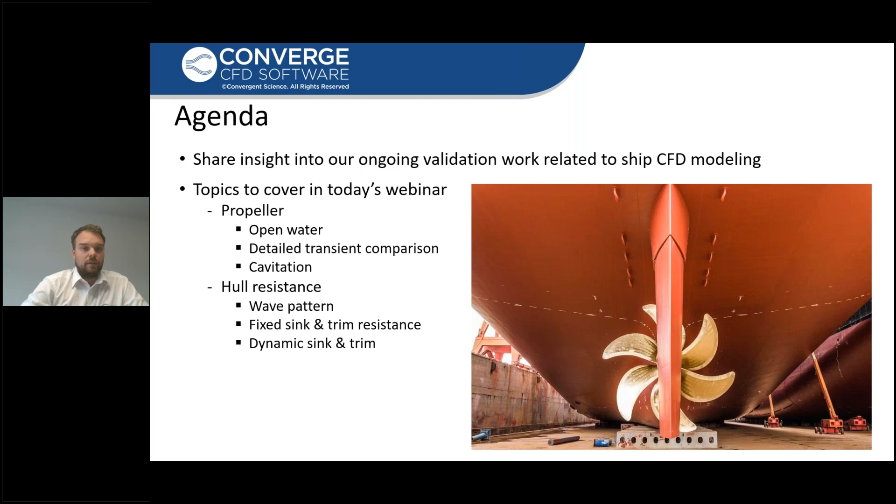But before that, just a few words about why we're doing all of this. So shipping is very important for global trade, and even though it's a very efficient method of conducting this transportation, it's still responsible for a large amount of greenhouse gas emissions.

So with the current environmental situation, of course, we need to reduce emissions to achieve those milestones. And to achieve those goals in the shipping sector, we must look at alternative fuels or propulsion systems, as well as continue to improve the overall ship efficiency.

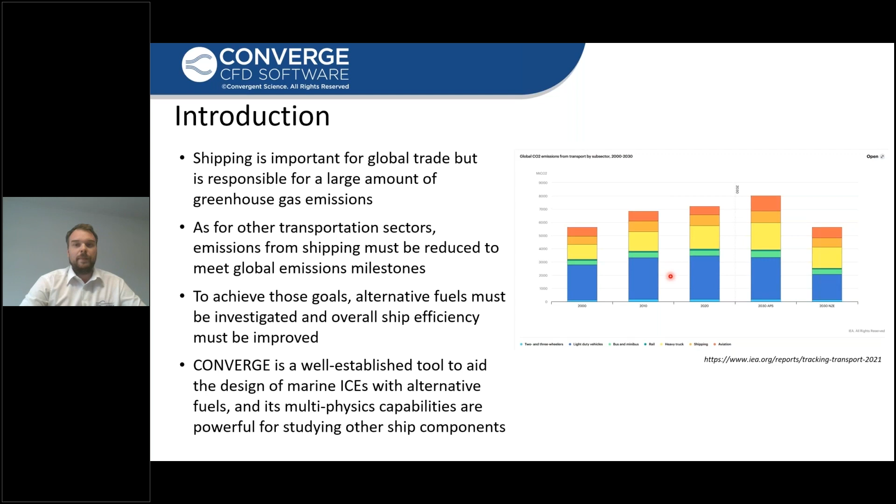So CONVERGE is a well-established tool to aid the design of marine ICEs, also for alternative fuels, and the multi-physics capabilities are powerful for also studying other parts of the ship design, which we will focus on in this talk. So let's jump right into it, starting with propeller modeling, first with the open water modeling.

The tests we are modeling are all at a constant rotational speed of 15 rotations per second. And in those tests, the thrust and torque were measured on the blades. So really the objective of these simulations is to establish the open water characteristic curve, where we are looking at the dimensionless thrust, torque, and propeller efficiency for a wide range of advance coefficients.

So generally speaking, those coefficients are made dimensionless by looking at the torque and the thrust on the blades, normalized with the propeller diameter, the rotation rate and density. What I just want to highlight a little bit more is that the advance coefficient is basically a non-dimensional form of the normalized vessel advance velocity.

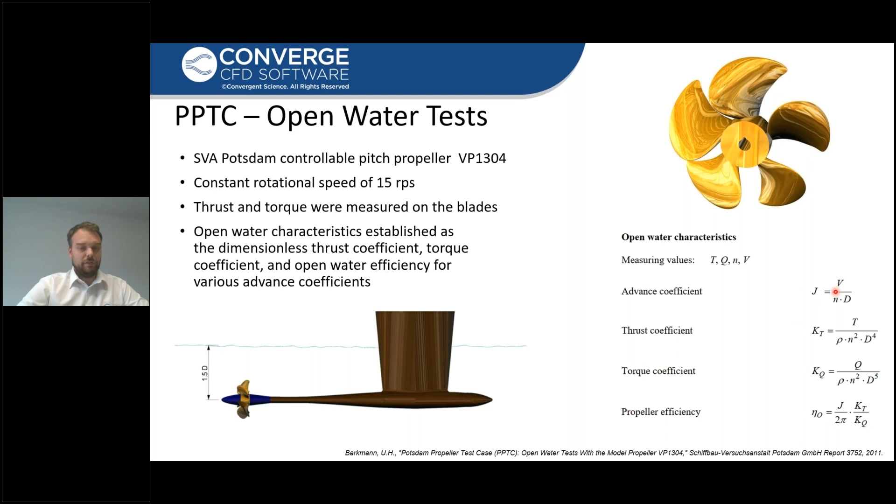And depending on the operating conditions here, we are around, let's say, 1.5, 1.6 million cells, depending on the AMR. So we use adaptive mesh refinement here based on velocity as well as the Y plus. So the reasoning why we're using it for the Y plus in these cases is that we want to have as uniform Y plus over the entire blades as possible, as well as we want to use the same simulation setup over the full range of advance coefficients.

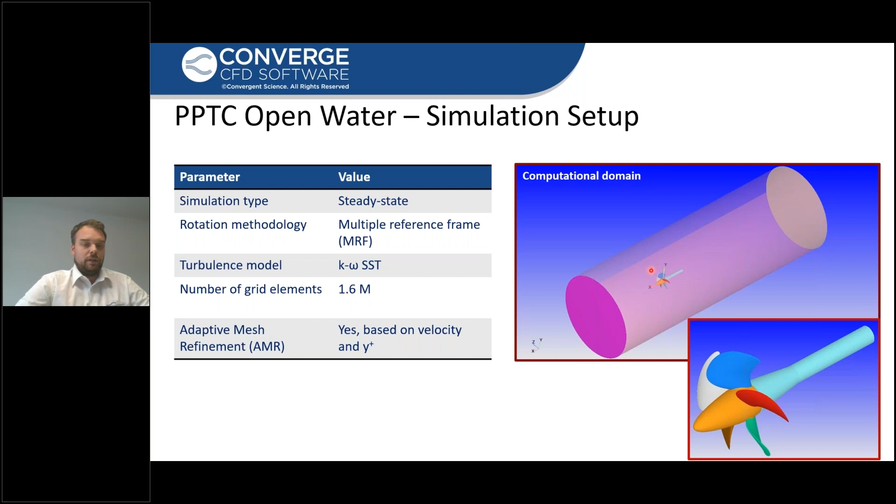So we are relying on wall functions here. We are not fully resolving the blades, and the reason for this is that our intention is to go to ship scale, where it might not be fully reasonable to fully resolve the boundary layers at those length scales.

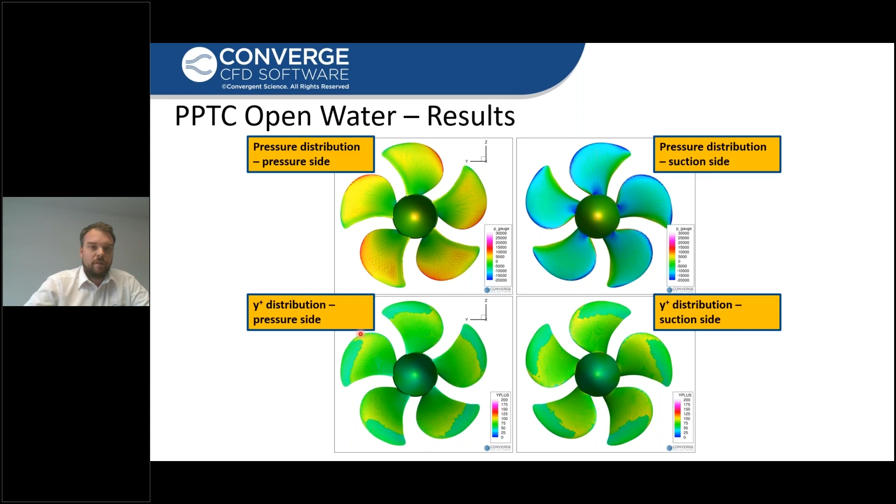And we can see overall throughout the entire range of advance ratios, we managed to very nicely capture the thrust and the torque with a maximum error of around 5% or so. And we also managed to nicely capture the peak efficiency point at 1.4 advance ratio coefficient.

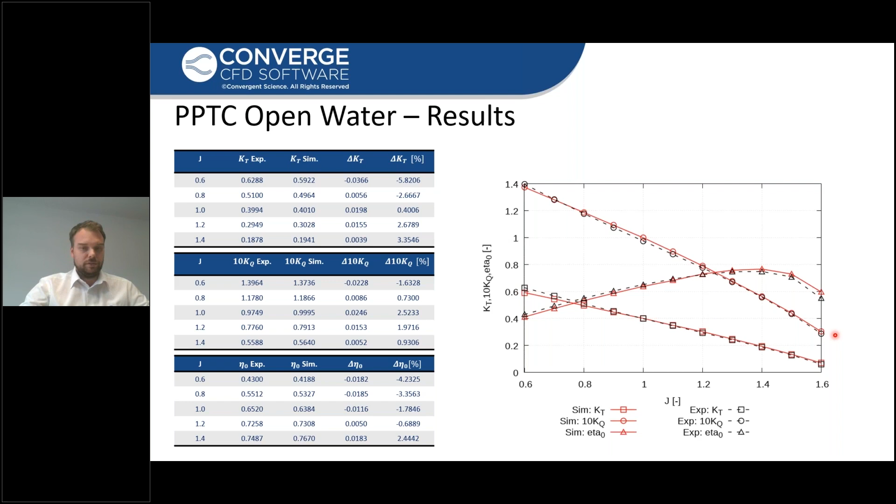So moving on to the transient simulations. So here again we're using the case and data from the PPTC. So in this particular test we're using the same propeller, but instead of the open water configuration, these measurements were done in a cavitation tunnel with a cross section of 600 times 600 millimeters.

And in these cases, LDV measurements were performed to give a very detailed description of the transient velocity field. So what we have is several planes downstream and upstream of the propeller with many monitor points where the velocity has been measured in all the different components.

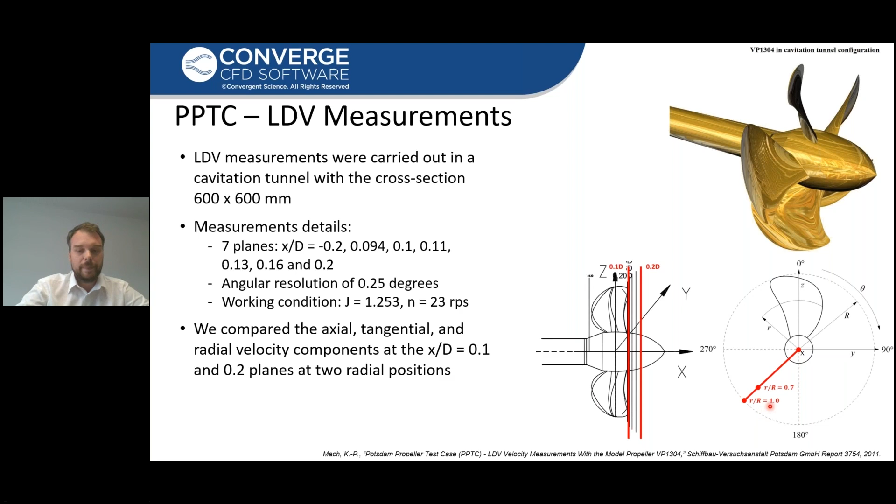So the simulation setup is again very similar, but instead we don't have this backward facing configuration anymore. It's the forward facing shaft, and we don't have the open water geometry anymore. We have actually modeled the actual geometry of the cavitation tunnel. So we have this cross section as described before with some rounded corners. And again, we have the inflow from the left side and the outflow from the right side.

The main difference is that these cases are no longer steady state. We are running this one in transient configuration, so we are actually rotating the propeller with the moving boundary approach in CONVERGE. So we use the k-omega SST turbulence model also here, but we allow a bit more refinement using AMR in this case, so the cell count tends to go up towards 9 million towards the end of this simulation. Since we're not looking directly at forces, we don't have AMR enabled on the boundaries itself, but only based on velocity and also helicity to try to preserve the vortices as well as possible.

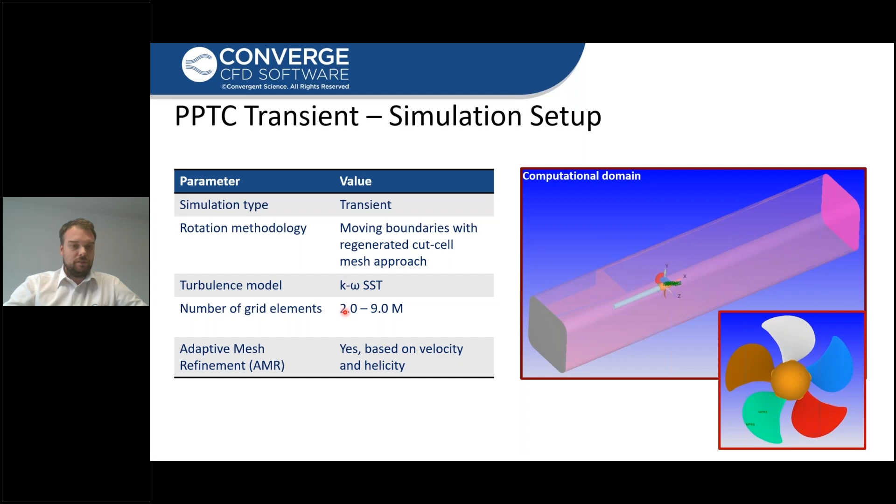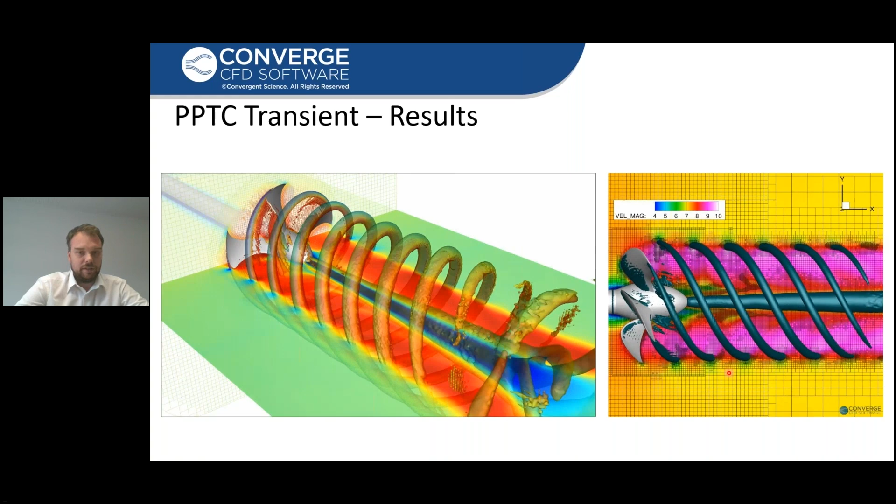So looking at one of these simulations, we have here on the left side an animation showing the cut plane through the propeller, showing how the mesh is updating over time. We have also another cut plane showing the velocity magnitude, and here the vorticity is illustrated by the isosurface of the Q criterion. So maybe more interesting is the animation on the right-hand side, again showing the same quantities, but we can see how the AMR is working to not only refine based on velocity, but this finest level of refinement is following the tip vortices as they're being transported downstream. We manage very nicely to capture this phenomenon.

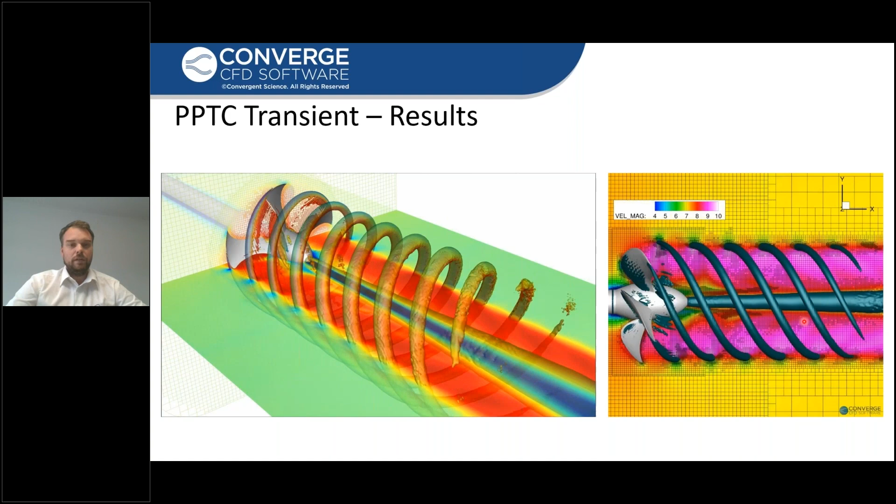But again, looking a bit more quantitatively, here we have the different velocity components compared between simulation and experiment. We have the simulation results in the solid lines, with red showing the axial velocity, blue the tangential component, and green the radial component, all normalized based on the advance velocity. On the left-hand side, we see the monitor point at x over D of 0.1, the plane closest to the propeller, at 0.7 times the propeller radius, and on the right-hand side at r over R of 1.0. These results are the transient velocity components over 1 revolution of the propeller, so 360 degrees. This means that we have all 5 blade passings captured in this monitor.

So we can see overall we manage very well to capture the magnitude and the trends of this transient phenomena. We do not fully manage to capture the magnitudes at the very edge of the blade tips as the blades are passing by. In these regions, the gradients are very strong, and it's possible we could have improved this by refining the mesh, but we have not done this at this point. Here are again the same measurements, but for the plane further downstream, and you can see, moving down only a little bit, these very strong velocity gradients at the blade tips have diminished, and we now manage much better to also capture the magnitudes.

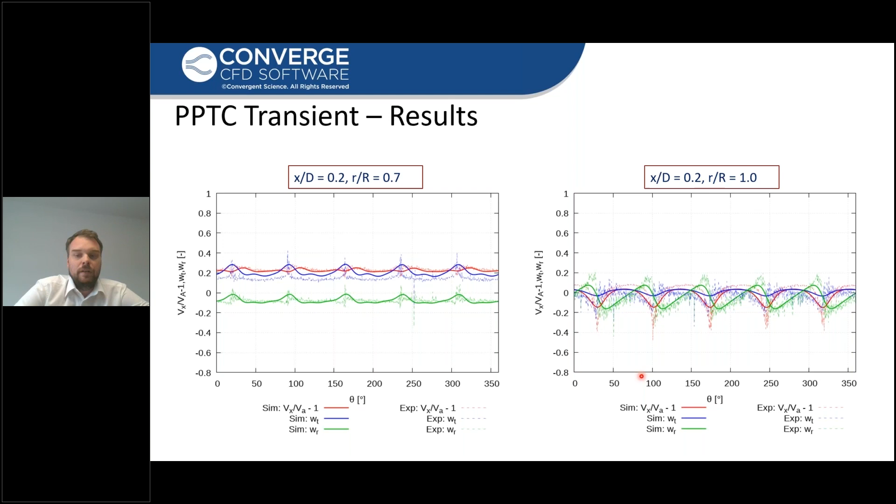So moving on to cavitation modeling. We have again run one of the operating conditions given in this PPTC report, the 2.3.1 condition. We have an advance coefficient of about 1 and a cavitation number of about 2, and now a bit faster, 25 revolutions per second. This simulation uses the exact same setup as the transient one previously shown, but the main difference is we are not running single phase anymore, as we need to also model the vapor. So it's a multi-phase simulation using the volume of fluid approach, and here we're using a Saito cavitation model. If you're familiar with CONVERGE, this cavitation model is not currently in the software, so we implemented a few new ones which will be available in our upcoming release. And it's no longer the k-omega SST turbulence model; now we are using the RNG k-epsilon.

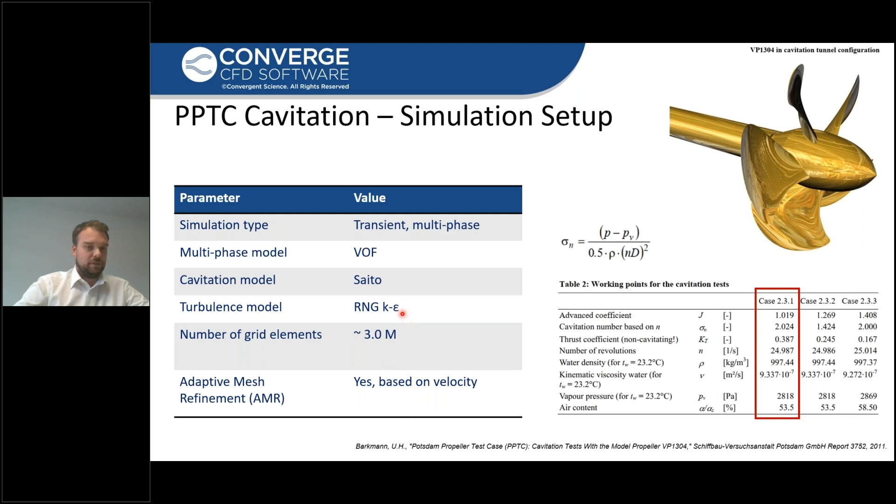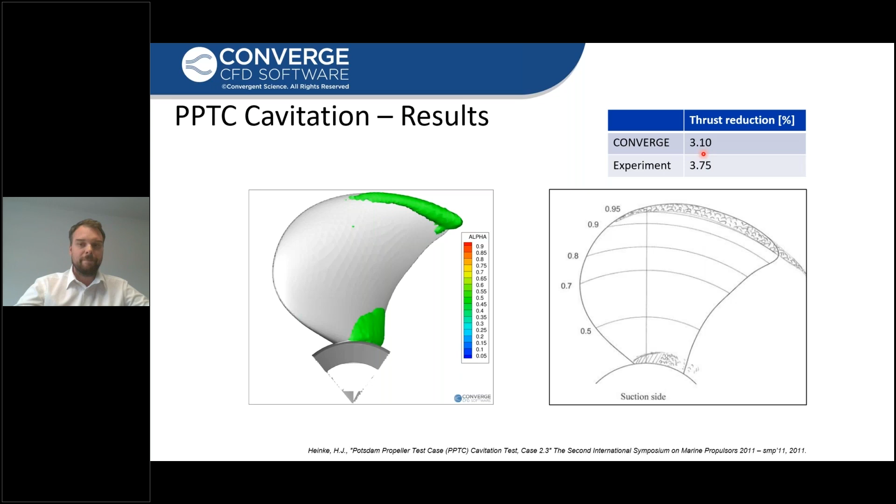And just looking at some of the results of the cavitation. On the left-hand side, we see the isocontour of the vapor volume fraction of 0.5, the simulation results for one blade. On the right-hand side, we have the sketch from the report of the location of cavitation observed. We can see that we managed very nicely to capture this location as reported. But not only the location, we also managed to reasonably capture the reduction in thrust due to cavitation. We observed a 3.1% reduction of thrust, whereas in the report it was measured as 3.75%. So that was all I wanted to show quickly about propellers.

So moving on to the hull resistance simulations. To do this validation, we ran simulations on this INSEAN 2340 model of this US Navy naval combatant. And here we are using the measurements and data reported by Olivieri et al. in this paper.

And in these tests, they did many measurements of this scaled model in this towing tank. And here we have much data: we have all the wave elevation profiles, we have the drag decomposed in pressure and viscous components, and also the dynamic trim and sinkage, which are occurring for a wide range of Froude numbers between 0.05 and 0.41. So we have this data for a wide range of vessel speeds.

So we can see here's a table of some of the model parameters. So I just want to point out that this particular case has a scaling factor of 24.8, so almost 25.

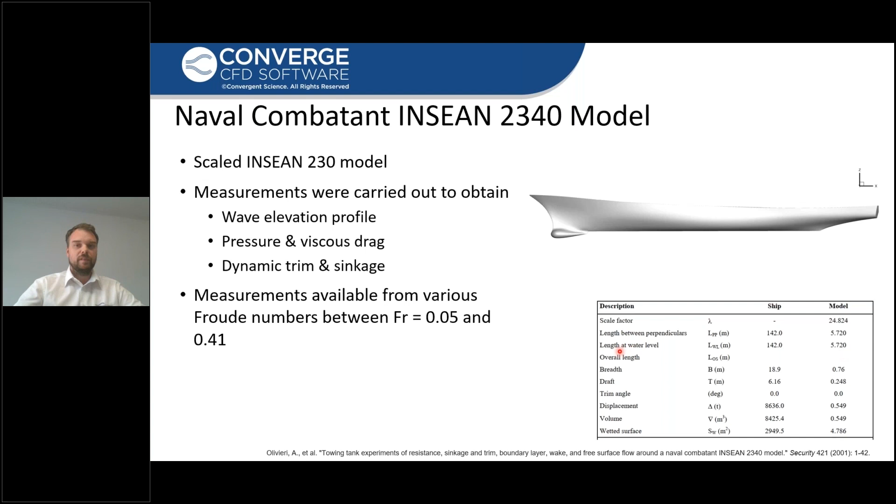And to do this, we are again using the volume of fluid approach. So as in these cases, it's of great importance to capture these waves with as great accuracy and resolution as possible. So we are using a front capture model, which is HRIC, which also enables some surface compression to try to keep this as resolved as possible. Again, it's the k-epsilon turbulence model.

And as we are very interested in forces, even at this scaled model, the length scales are quite large. So we are modeling the boundary layer using the inlaid mesh feature in CONVERGE. And so we have a first boundary layer cell size of about 1 millimeter with 5 layers at 1.5 expansion ratio. So I want to highlight the goal here is not to fully resolve the boundary layer all the way down to y+ of 1 or so. We are still targeting y+ of around 30.

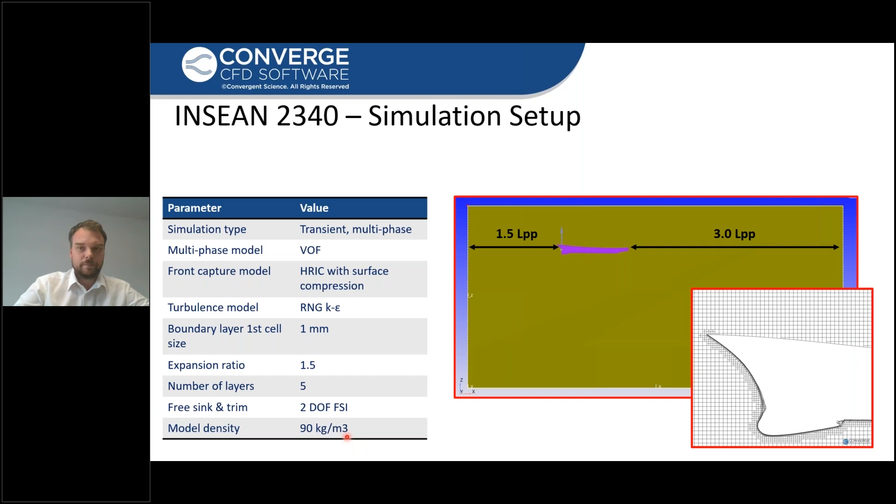So looking at some of the results, here is showing one case, this particular one is at Froude number 0.28. And what we see on the right side is the iso surface of the waves. So it's the iso surface of alpha 0.5 colored by the normalized wave elevation height. And what we have done is we have taken these 3 cut planes as highlighted by the dashed black lines and plotted them and compared the wave elevation height against the measurements.

And we can see, especially close to the boat, we managed to very nicely capture the different wave features going all the way downstream as the measurements are reporting. And this trend continues when we go a little bit further away from the boat. What we can see is that at the plane furthest away, those waves do not fully dampen out as we would expect from the measured values, which would maybe need a little bit more investigation.

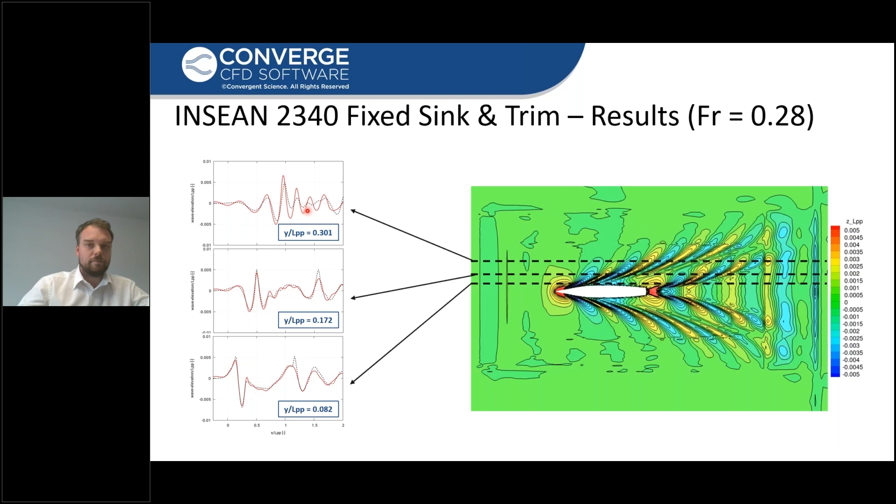But overall, what we want to compare is the forces. So this was the forces result for the fixed sink and trim simulation. So on this plot on the left, we have the pressure component of the drag force, and on the right, the viscous components. And those are reported for 3 different speeds. So we had Froude number 0.1 in the red, 0.28 in the blue, and 0.41 in the green. And again, the simulation results are visualized with the solid lines and the experimental ones with the dashed lines.

So what we can see is, both for the pressure and the viscous force, we manage quite well to match what was reported by the experiment, with some exception maybe for the pressure force and the viscous force at the highest Froude number case, where the pressure force is slightly underpredicted and the viscous force a bit overpredicted.

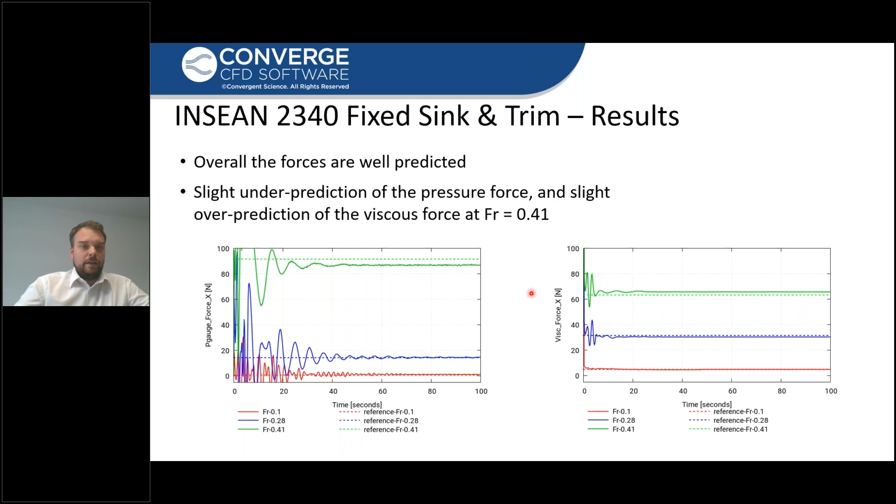So looking again at the free sink and trim, as said here, the boat was allowed to float and rotate or pivot around its center of mass freely based on the flow conditions. And on the right side, we see again the pressure force reported and the viscous force. And here they are also compared between the fixed case, so the results reported in the previous slides, and the updated ones with the free sink and trim. And we can see generally we don't see too much difference in the forces, except that it actually seems to improve the pressure force prediction for the highest speed case.

And also looking at the graph on the left side, we compare the dynamic sinkage observed as we go between the different speeds. So at the lowest velocity, at Froude number 0.1, the boat is pretty much staying in its initial position, but as we keep increasing the speed, we see that the boat starts sinking lower into the water, as also reported by these measured values.

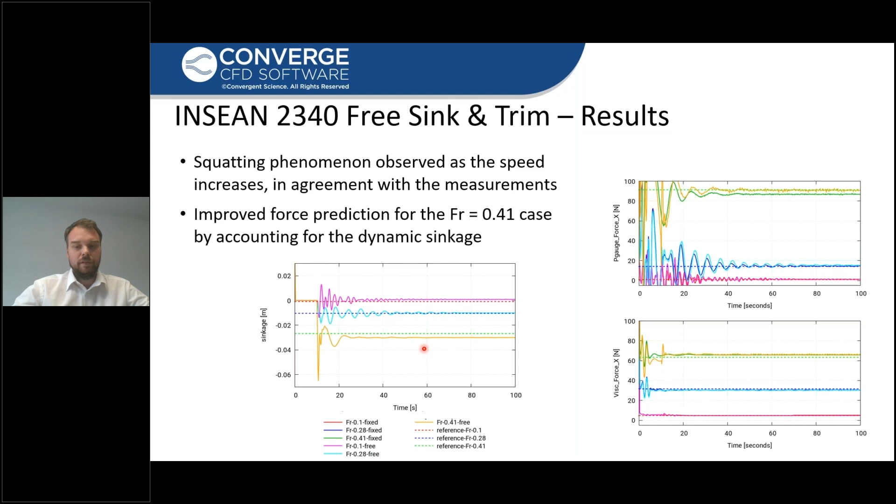So this was very quickly. I've showed you some of our current and ongoing validation work for the propeller, using the Potsdam propeller test case for steady open water conditions, and also some detailed comparisons of the velocity field for transient simulations. And we also did some investigation of a newly implemented cavitation model for this PPTC test case. I also showed you some validation work we're doing for the hull resistance and wave pattern prediction on this INSEAN 2340 model for both fixed sink and trim and also the dynamic prediction.

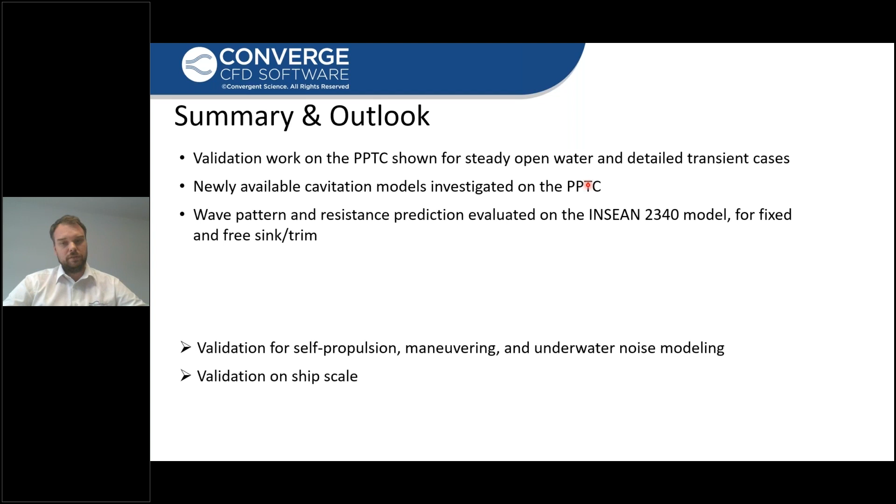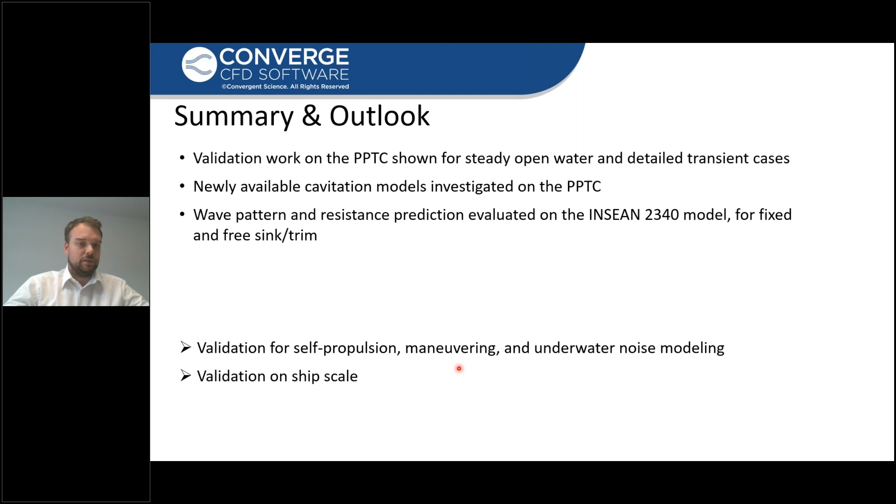So some things we are wanting to do and working on: this is still, let's say, quite basic, and we're starting from the simpler simulations, and what we intend to do is continue to more advanced simulations such as self-propulsion, maneuvering, and underwater noise modeling. And also, since we have only shown so far results on model scale, the intention is also to perform similar validation going to full ship scale.

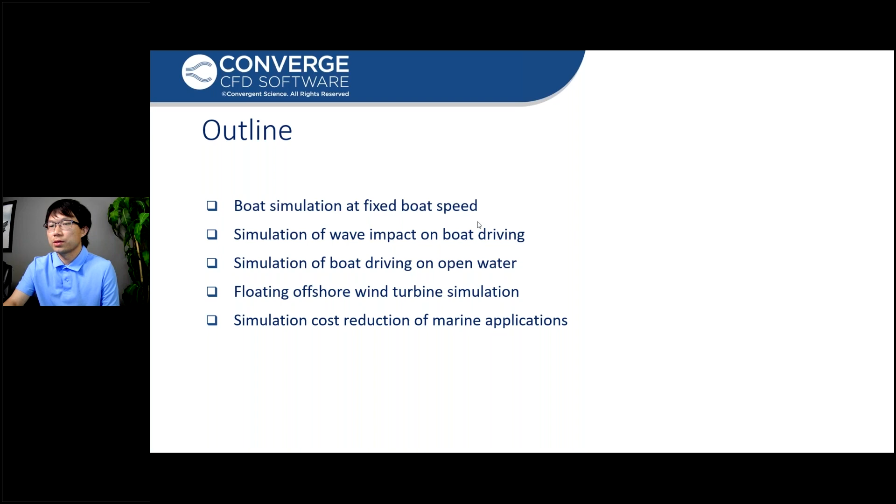First, let's take a look at this very common scenario where a boat drives at a fixed speed. The boat's pitch and drag force at a certain running speed are very important parameters to evaluate boat designs. However, these parameters are difficult to predict due to complex relationships between the boat pitch, position, drag force and other variables. Usually, the boat speed and the relative angle between the boat hull and the thrust direction are known from the design aspects, but the thrust magnitude, drag, and boat balance position, including the pitch and the vertical position, are hard to simulate since they are coupled with each other.

For example, if the boat is at a higher position, the lift is probably not enough to balance the boat, then the boat will lower its position. At the same time, the drag force will change. Also, the boat could rotate. So a dynamic motion simulation is necessary to predict the drag and balance position for the boat simulation at a fixed boat speed.

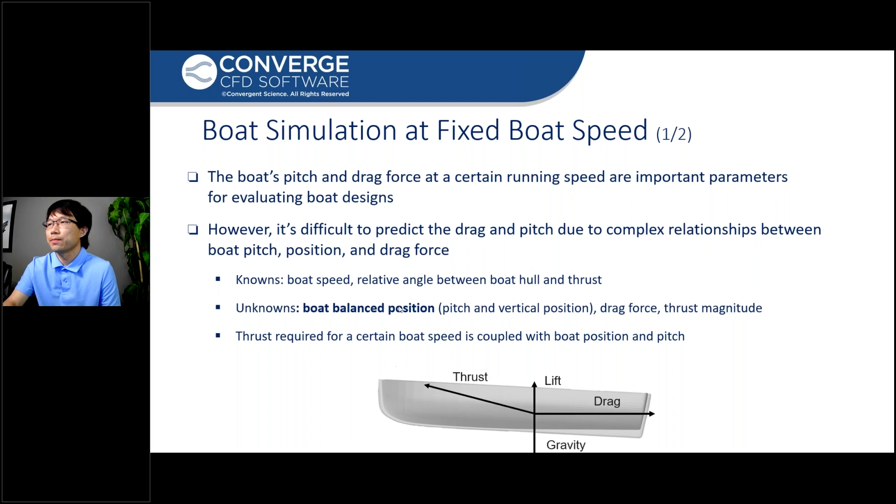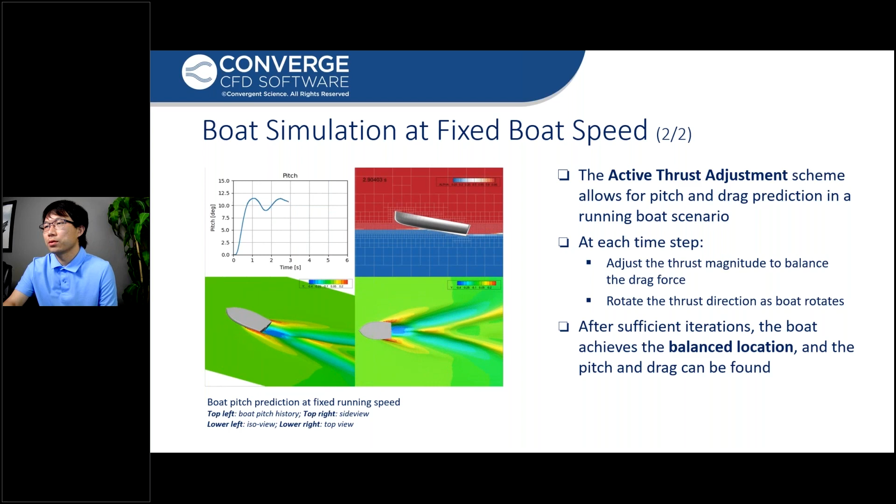So in real life, the water is not always as steady as calm water, and the waves are usually very common in the lakes and the ocean. So here I will demonstrate how to use CONVERGE CFD to simulate the wave impacts on boat driving. In CONVERGE CFD, we have a package for the wave generation, including 2D, 3D, regular, irregular, linear, or nonlinear waves.

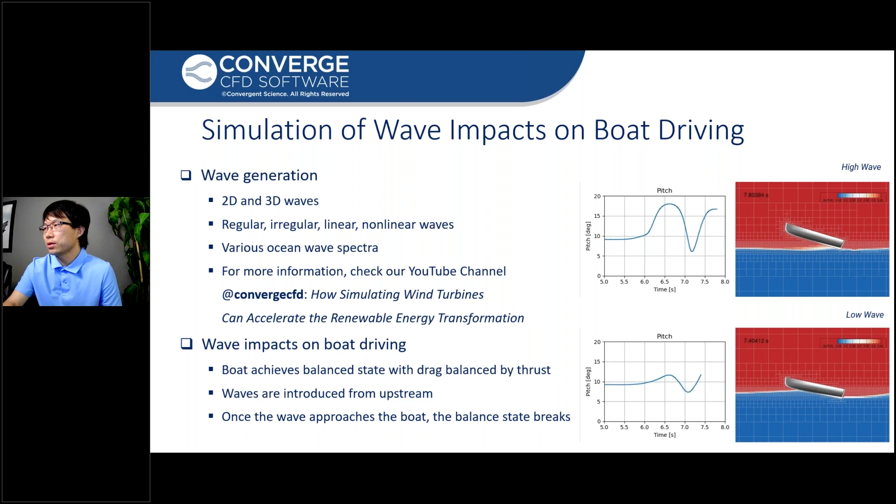Now let's take a look how to use CONVERGE CFD to simulate the wave impacts on the boat driving. For the first stage, the boat can achieve its balanced state with drag balanced by the thrust using the advanced auto active thrust adjustment scheme I mentioned previously, and then the waves will be introduced from upstream. Once the wave approaches the boat, the thrust magnitude will be locked, and the balance state will break. So from the cases we tested on the right side, the higher wave will cause the boat to rotate greater, so it could be a safety concern.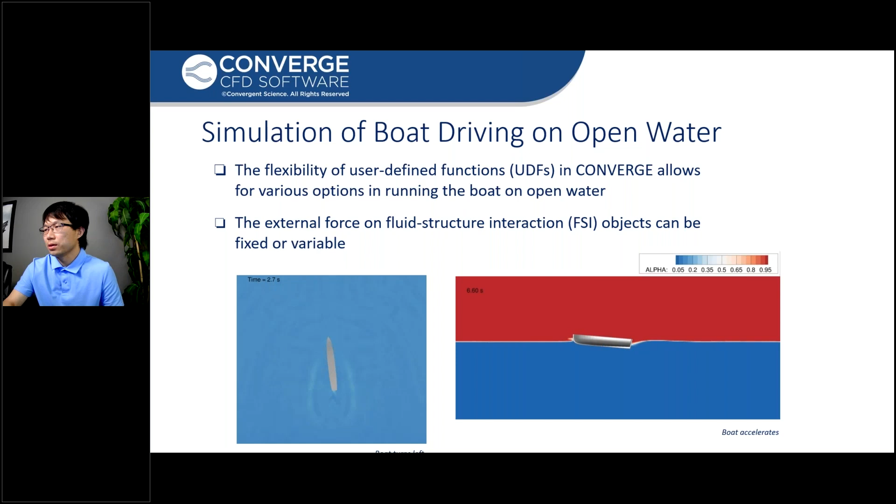And CONVERGE CFD has the capability to use user-defined functions (UDFs) to simulate the FSI object. So the flexibility of UDFs in CONVERGE can allow the users various options in running the boat on open water. The external force on FSI objects can be fixed or variable. Like shown on the left-hand side, the thrust direction can be changed during the simulation, so we can mimic the turning process in the boat riding. And on the right-hand side, we keep the thrust direction fixed, and the boat acceleration process can be simulated.

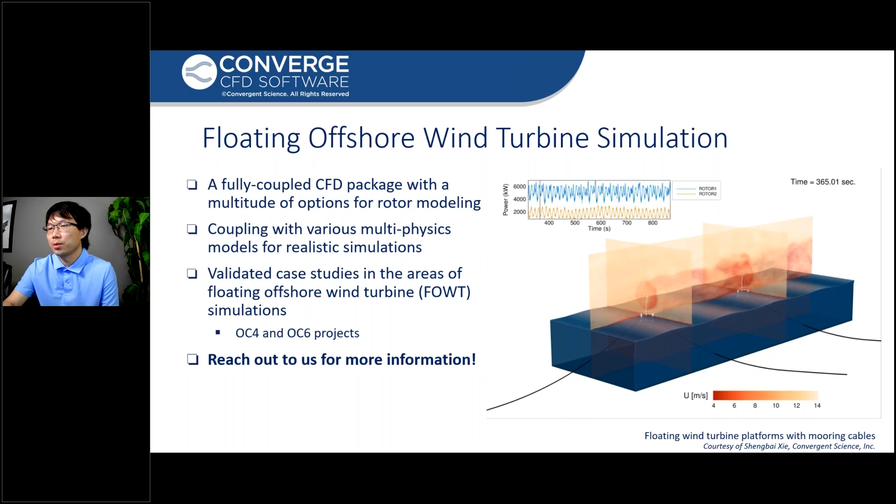Besides the motion simulation for the boats, we also have very successful experiences in floating offshore wind turbine simulations. CONVERGE CFD has a fully coupled CFD package with a multitude of options for rotor modeling. Also, it's coupled with various multi-physics models for realistic simulations. And we have a lot of validated cases in the areas of floating offshore wind turbine simulations, like OC4 and OC6 projects. Please reach out to us for more information.

And after talking about different scenarios in simulating the motions of boats and floating offshore wind turbines, here I want to talk about the simulation cost reduction of marine applications. So it's very common that marine applications have a large simulation domain and complex motions. It could be very expensive to do the simulation. And here I will introduce a couple of advanced features to reduce the simulation cost of marine applications.

The first feature is called FSI object updated at intervals. So instead of updating the FSI object at each time step, which could be expensive, CONVERGE CFD can allow the user to update the FSI object at intervals, which can reduce the cost. So we take advantage of the different time scales between the FSI object motion and the turbulence. So we can use this FSI object updated at interval feature for the marine application.

Our second feature is called moving embedding and AMR regions. Since we have a large simulation domain and at the same time the local embeddings around the FSI object are necessary for sufficient grid resolution, we have these moving embedding and AMR regions to move with the FSI object, which will reduce the total cell count in the simulation.

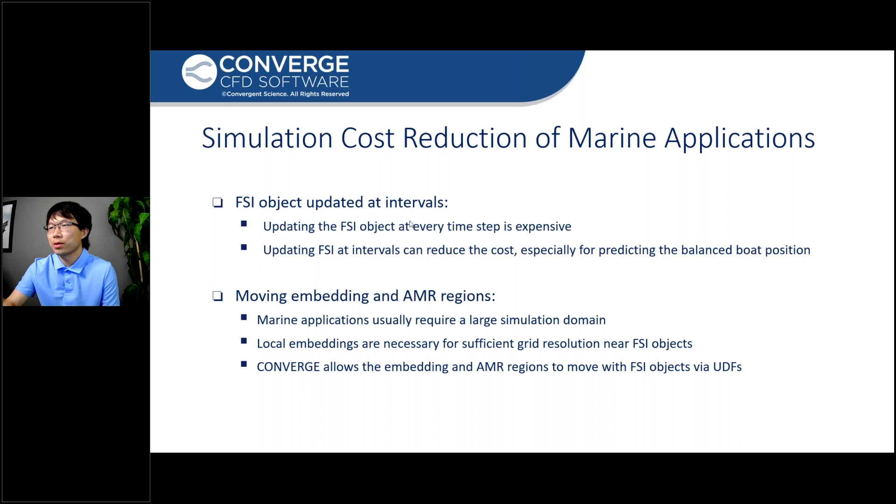And here I want to briefly mention why users should use CONVERGE for marine application simulations. First, we have very convenient grid control techniques. The fully automated meshing process of the Cartesian grid will eliminate user meshing time, even for very complex geometries. We have different grid control techniques for the Cartesian grid, like fixed embedding and adaptive mesh refinement, AMR. Also, inlaid meshing is available for stationary or moving structures.

And secondly, there are many high-fidelity physical models available in CONVERGE CFD, including turbulence, VOF, and FSI. Also, CONVERGE has been validated for a variety of marine applications, like oceanic wave generation, ship hulls, ship propellers, and floating offshore wind turbines.